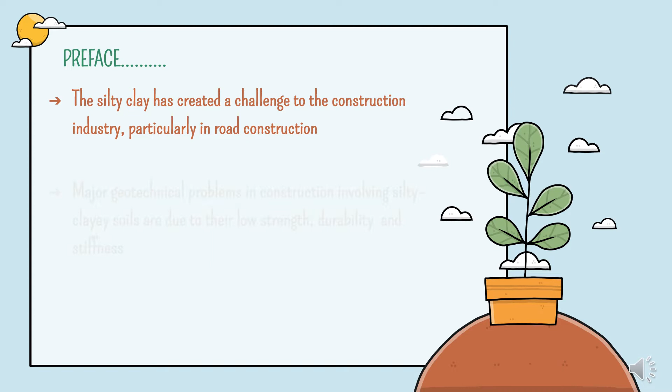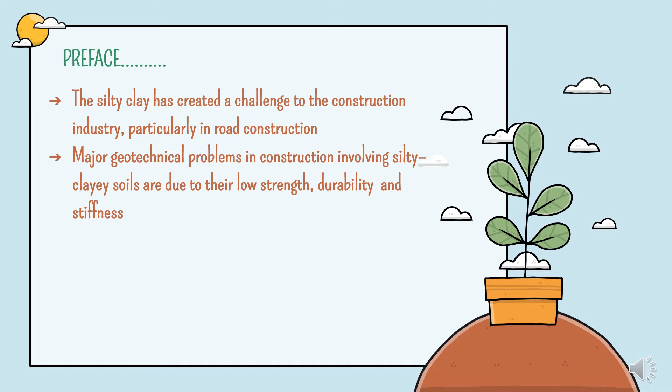So next is the introduction. In Malaysia, development of the national road network, residential and commercial properties have encroached into areas underlain with very soft soil. And then the silty clay creates a challenge to the construction industry, particularly in road construction. In this formation, major geotechnical problems in construction involving silty clay soil are due to their low strength, durability, and stiffness. This problem may cause damage to the foundation of buildings and cracks along the road pavement.

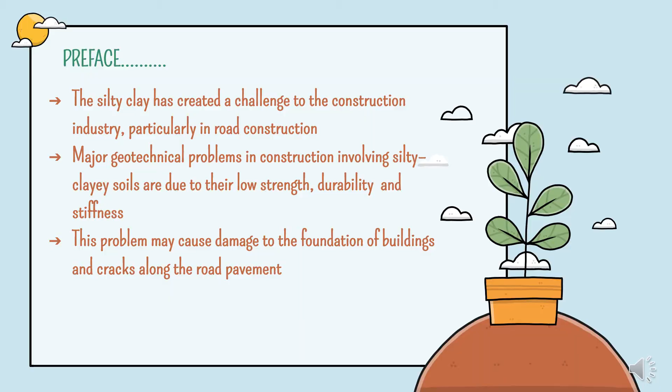So, with this issue in mind, in this research, our group provided a few methods to improve the silty clay problem. Problem statement. Silty clay soils are not suitable in construction because of their low strength and stiffness, and they are also too warm in the spring, compact easily, tend to be alkaline and hold in water, and lastly are slow to drain.

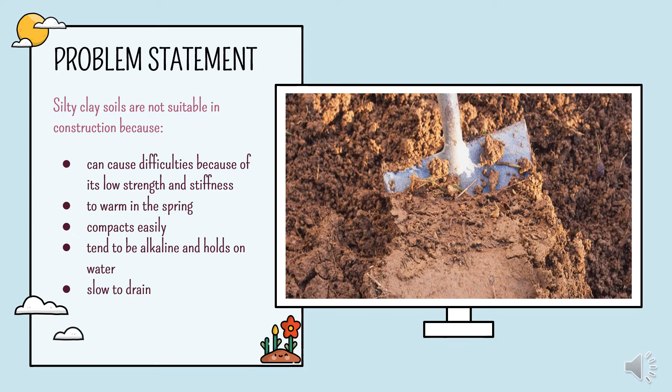And then I will continue to the objective. The objective of this research is, first, to identify silty clay problems in construction, and the second is to suggest a suitable method to overcome the problem of silty clay.

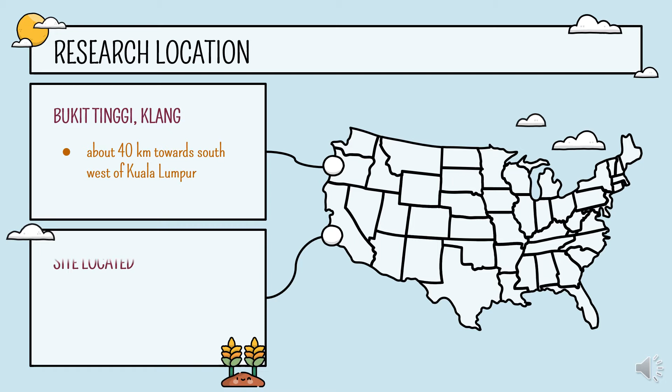For the research location, it was at Bukit Tinggi, Klang, which is about 40 km southwest of Kuala Lumpur. The site is located at the contact boundary of the Quaternary Alluvium and the Kenny Hill Formation.

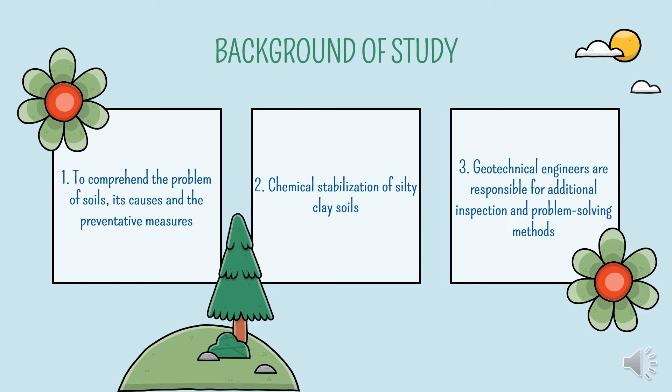Next is the case study. The first one is treatment of soil using lime and cement. The treatment of soil using lime and cement is one of the appropriate techniques that provide a solution for poor geotechnical soil used in road construction as subgrade layers. The present paper consists of a comparative study of the bearing and sustainability of silty soil treated with lime and cement. The tests carried out on samples of treated silty soil show a great improvement in workability and bearing capacity compared to a natural one.

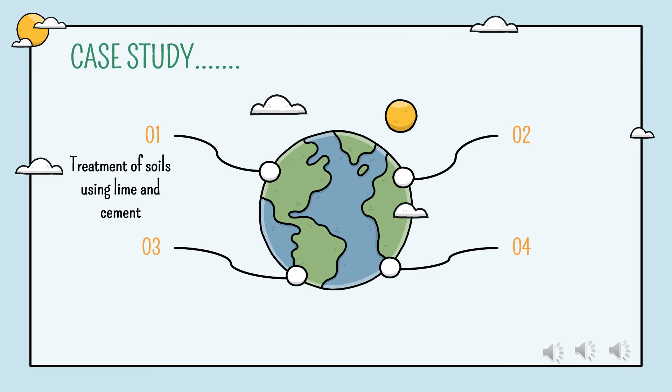The second one is poor geotechnical properties. The depletion of natural resources in noble materials and the increase in the cost associated with the use of these materials require the use of local materials in geotechnical works. However, the poor geotechnical properties of these materials cause difficulty for construction projects. Therefore, they must be stabilized in order to improve their properties. Soil treatment with a hydraulic binder is one of the appropriate techniques.

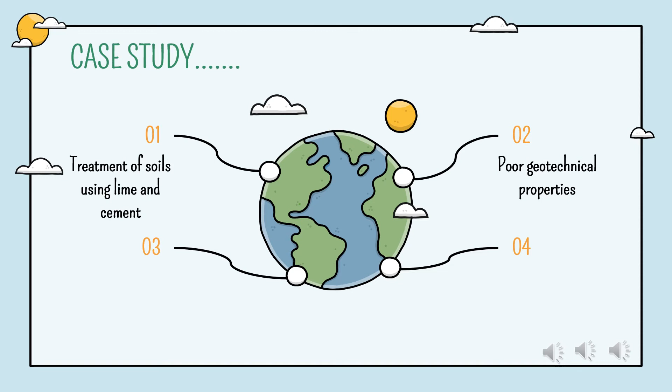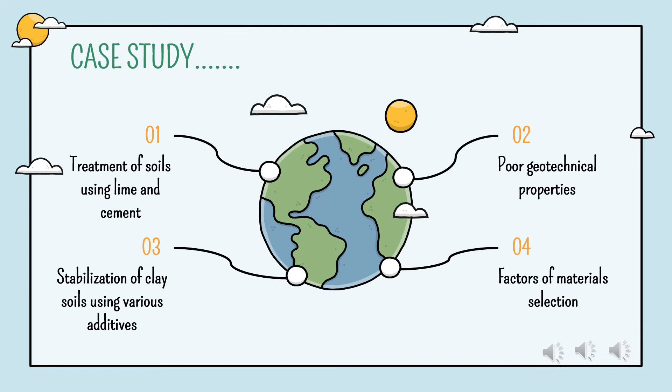The third one is stabilization of clay soil using various additives. Several research studies have been performed on the stabilization of clay soil using various additives like cement, lime, fly ash, and silica fume. Fine soils like clay and silt have undesirable poor properties for use in road construction. The execution of the treatment is cold working, which significantly reduces pollution and the discharge of noxious fumes into the atmosphere. This technique allows a significant overall energy saving by reducing material to be transported.

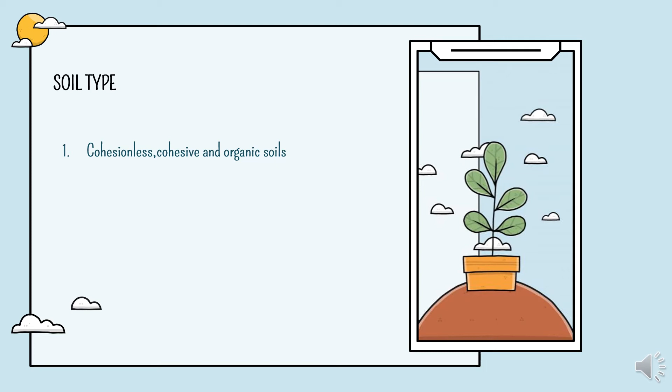Type of soil. Soil may be separated into three very broad categories: cohesionless, cohesive, and organic soil. Cohesive soils are characterized by very small particle size, where surface chemical effects predominate. The particles do stick together, the result of water-particle interaction and interactive forces between particles. Cohesive soils are therefore both sticky and plastic.

Cohesive soil is mostly clay, but also silty clay and sand-clay mixtures with clay being predominant. Clay soil cannot be separated by sieve analysis into size categories because no practical sieve can be made with openings so small. Instead, particle size may be determined by observing settling velocity of the particles in a water mixture.

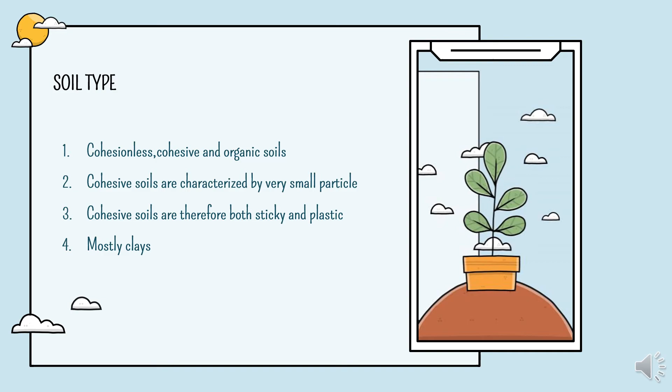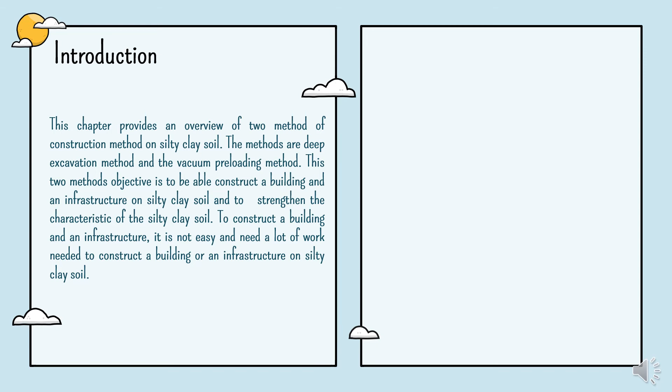This chapter provides an overview of two construction methods on silty clay soil. The two methods that we use in this report are, first, the deep excavation method and, second, the vacuum preloading method. The objective of these two methods is to be able to construct a building or infrastructure on the silty clay soil and to strengthen the characteristics of the silty clay soil.

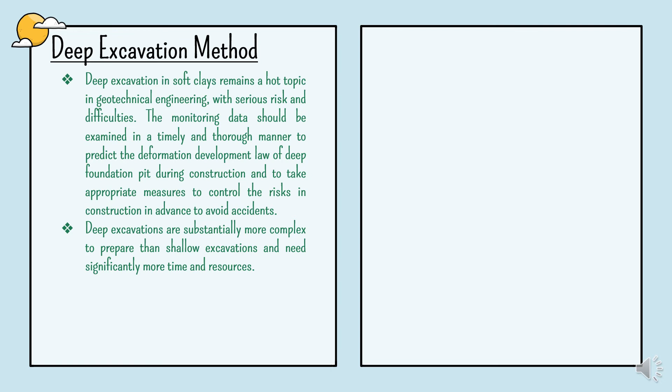Deep excavation in soft clay remains a hot topic in geotechnical engineering with serious risk and difficulty. The monitoring data should be examined in a timely and thorough manner to predict the deformation development law of deep foundations. Deep excavations are substantially more complex to prepare than shallow excavations and need significantly more time and resources. Deep excavation has become more necessary for better space usage as the world population has grown.

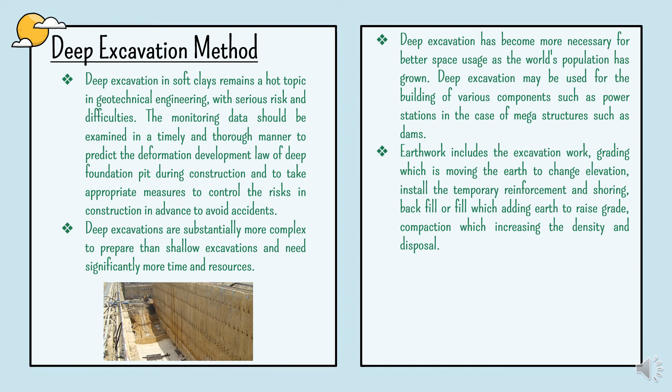Deep excavation may be used for the building of various components such as power stations, in the case of mega structures such as dams. Earthwork includes the excavation work, grading, which is moving the earth to change elevation, installing temporary reinforcement and shoring, backfill or fill, which is adding earth to raise grade, and lastly compaction, which is increasing the density, and disposal.

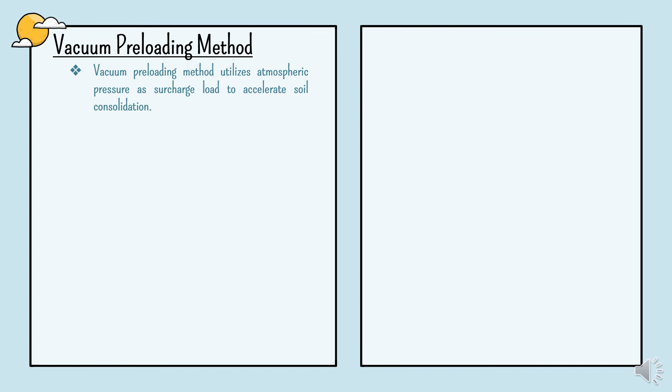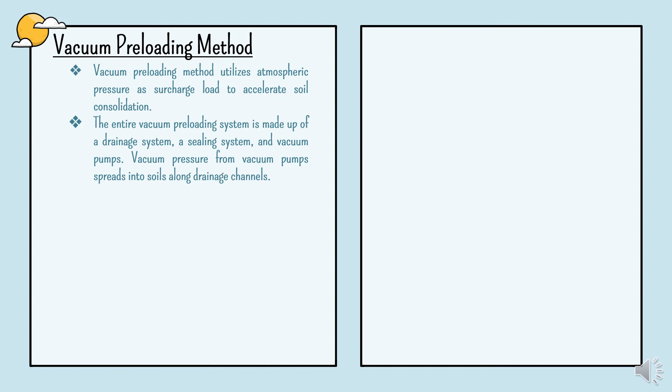Next, the vacuum preloading method utilizes atmospheric pressure as a surcharge load to accelerate soil consolidation. The entire vacuum preloading system is made up of a drainage system, a sealing system and a vacuum pump. Vacuum pressure from the vacuum pump spreads into the soil along drainage channels. A drainage system is an integrated network of PVD, horizontal filter pipes, and a sand layer that forms a comprehensive channel for distributing vacuum suction and water movement.

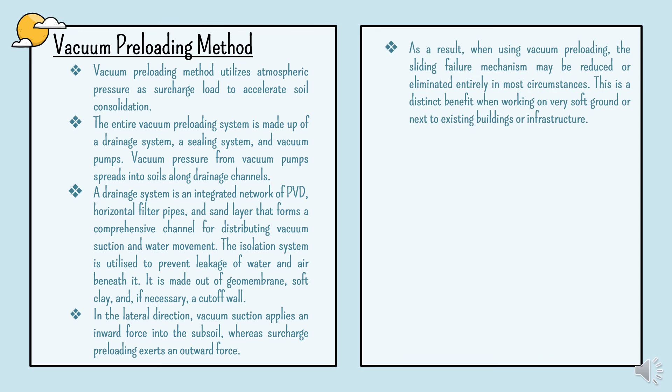The isolation system is utilized to prevent leakage of water and air beneath it. It is made up of geomembrane, soft clay, and if necessary, a cut-off wall. As a result, when using vacuum preloading, the sliding failure mechanism may be reduced or eliminated entirely in most circumstances. This is a distinct benefit when working on very soft ground or next to existing buildings or infrastructure.

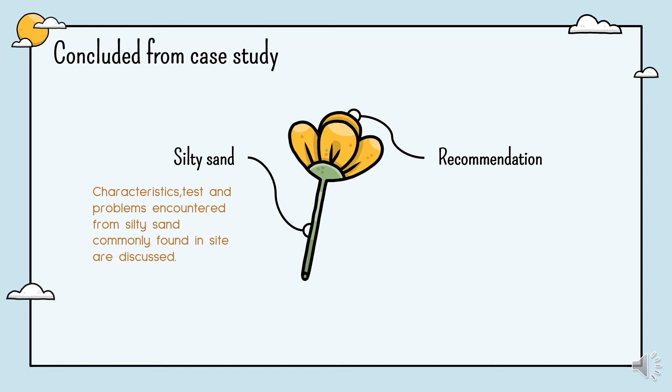So from the case study conducted, we have found the disadvantages of silty clays, the field tests that can be used to determine silty clays, and ways to fix silty clays. For tests such as distinguishing clays from silts, a hydrometer test is frequently required to adequately characterize the particle size fraction of a silty clay. Disadvantages of silty clays are that they are difficult to improve, and silty soils are more difficult because they tend to retain moisture.

There are many ways to fix the problem; for treating poor geotechnical soil, we can treat it with lime and cement. However, the easiest ways to treat silty clays in construction are deep excavation and vacuum preloading. These two methods improve silty clay soil characteristics for construction of a building or infrastructure on silty clay soil. However, these ways to improve the condition of the soil require a huge amount of effort and cost, which makes the construction a bit difficult.